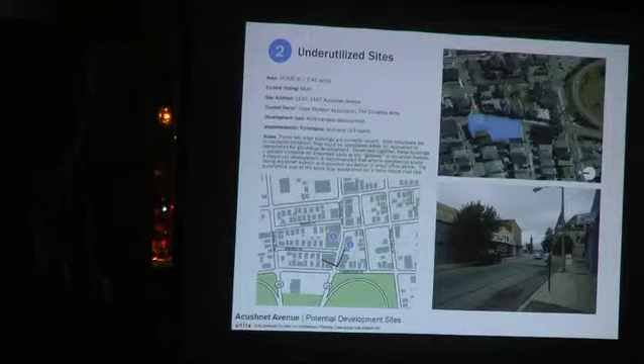The other thing that we think is critical as another first step, besides development on city-owned or private parcels, is to begin seeking grants for streetscape improvements. These are meant to enhance the pedestrian experience along Acushnet Avenue, and they're also meant to deal with things like traffic calming and improvement of traffic behavior along the corridor.

This is really a placemaking project, as much as it is a transportation project. So our streetscape recommendations try to balance transportation questions, truck turning radii, traffic speeds, where the bus stops are, with an ability to capture back more sidewalk space or outdoor cafes, or to enhance the kind of festivals that happen.

So we did some extensive field trips here during the hottest months of the year, I'm remembering now. And we looked at both the pros and cons of the existing conditions.

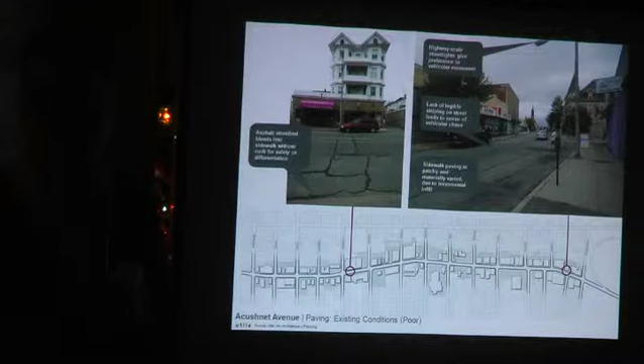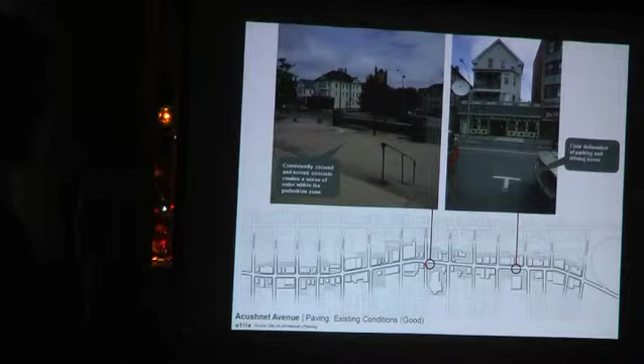It's good, for example, to mark where cars park so they don't take two spaces—better parking management along the valuable parallel parking spaces, which are key for a quick in and out for shopping. There's also, in front of the church, better examples of landscaping that enhance the experience.

And we identified a kit of parts and strategies that might together make up a better public realm along Acushnet Avenue. That includes things like recapturing sidewalk real estate by selectively removing parallel parking spaces to get wider sidewalks, where it might make sense for an outdoor cafe or a bus stop.

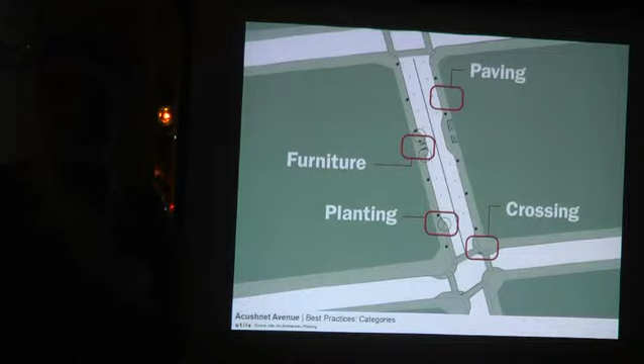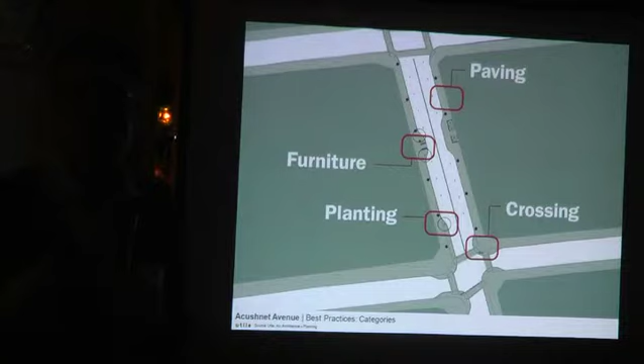Dealing with neck downs at the pedestrian crossings at intersections to create a perception that the street is narrower there for pedestrians to cross back and forth, to not prioritize cars over people. And dealing with selective street plantings and street furniture to make it a more user-friendly landscape. As part of our study, we collected best practices for paving materials, streetscape approaches, and bicycle racks.

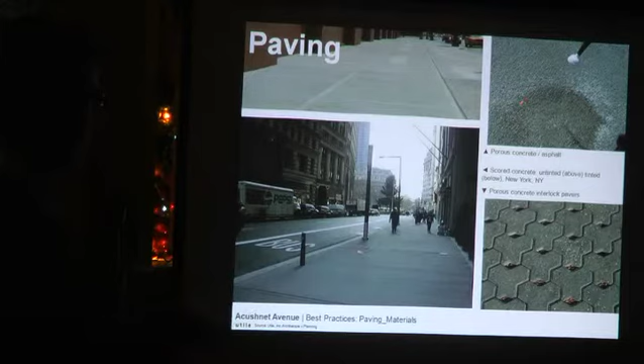I'm not going to go through this in detail now, but I'm going to show you a couple of slides with examples of paving—in some cases pervious paving, which means we can send less stormwater into the storm drains to deal with stormwater flows—or more attractive paving patterns as they might happen along the avenue.

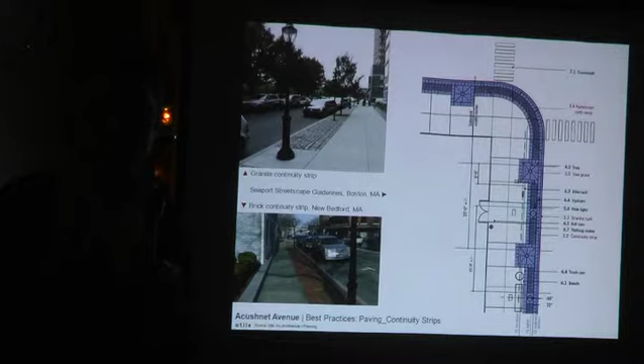One of the things we're recommending is to create what's called a continuity strip, a different paving detail right next to the curb that collects the street tree grates, the bike racks, the mailboxes, and the bus stops, to begin to organize some of the street furniture along Acushnet Avenue.

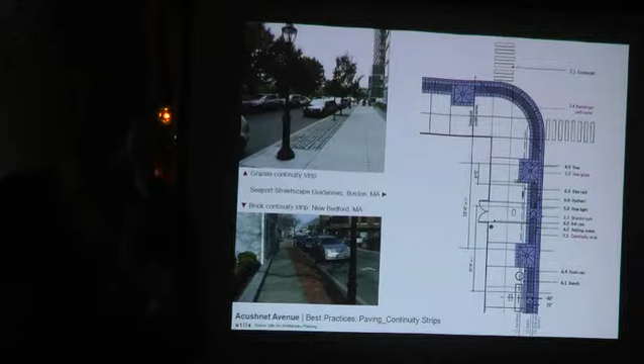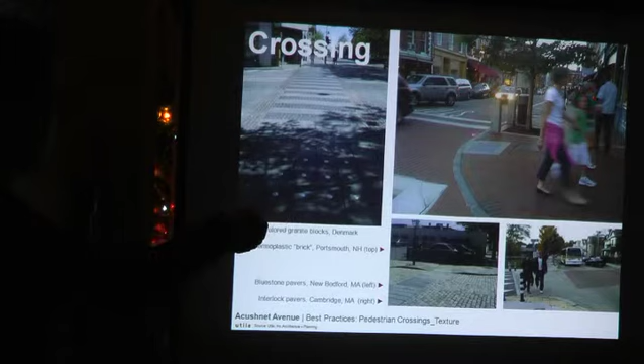And to really enhance those points at the intersections where crosswalks happen, where you can do curb extensions into the zone where the parallel parking happens to get what's called neck downs between the two sides of the street, and even look for ways that we can unify with paving the pedestrian experience across both sides of the street.

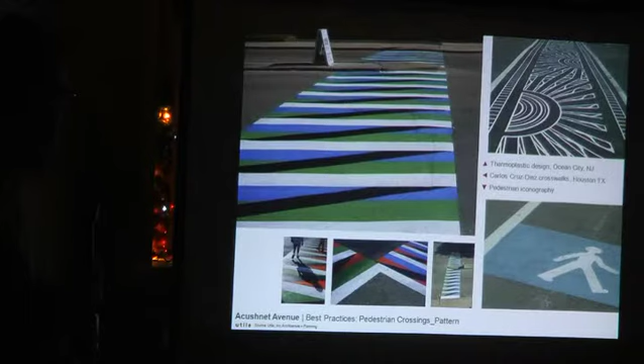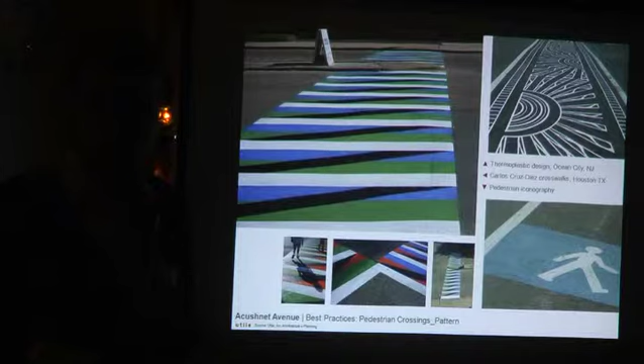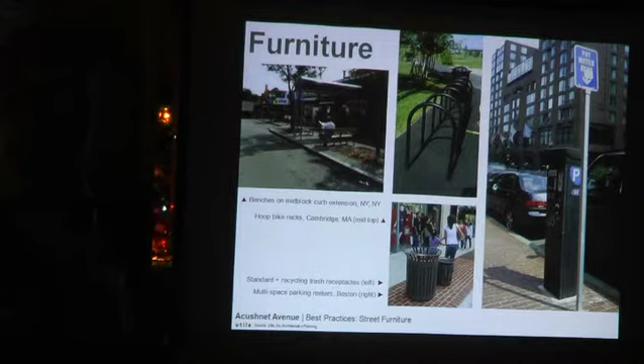And then getting a standard for the street furniture, so that the garbage cans, the bicycle racks, and maybe even a different way to deal with metering, if we can find the right grant monies for this, might make it a more attractive destination for pedestrians to come.

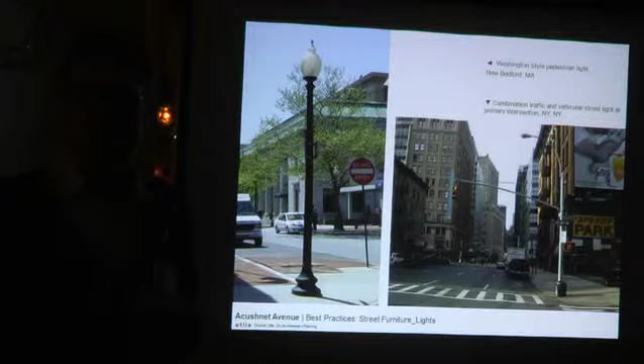And also streetlights too. So that gives you an idea about what our palette might be for thinking about the study area as a single placemaking exercise, and planting as well.

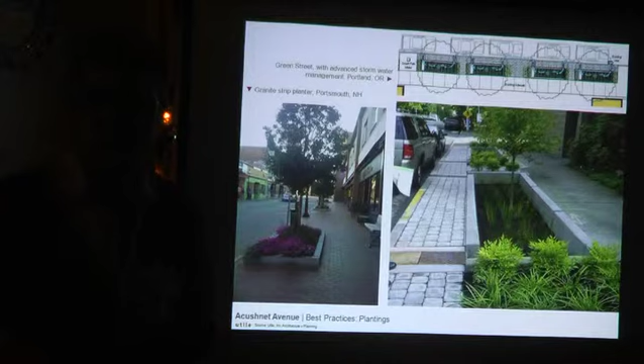These are fancy stormwater solutions in Portland, Oregon, where they don't have snow plowing and salt and sand, so it's a little easier to do it there. You guys will find solutions for our climate as well.

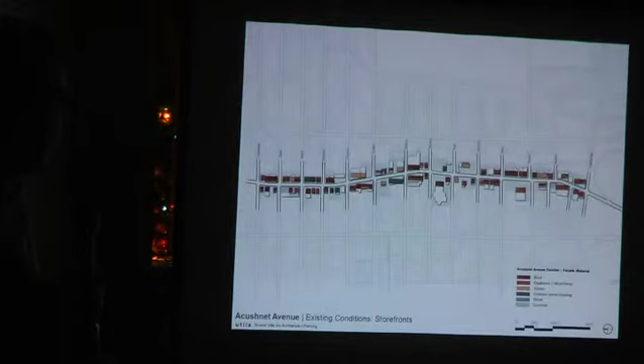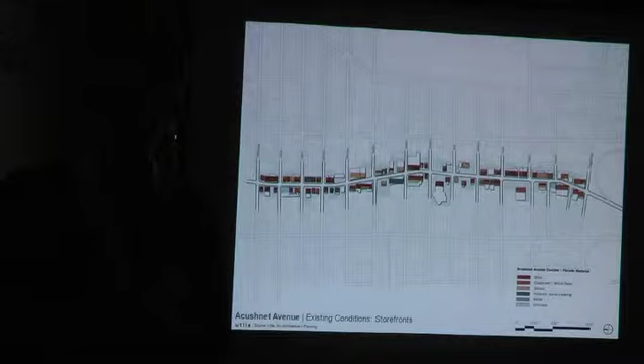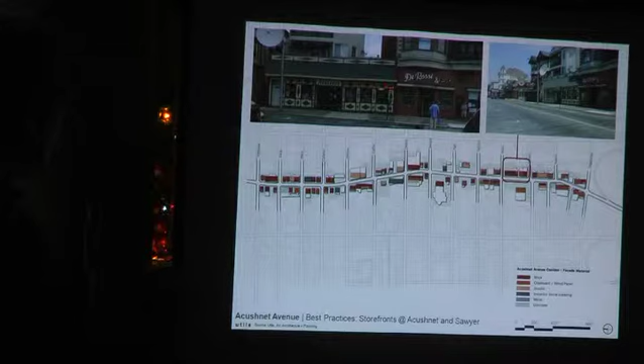This is a map of the variety of materials that make up the shop fronts. We would rather leverage the variety of signs, graphics, and materials and enhance that as much as possible, not turn it into a perfect thing that Acushnet Avenue isn't. We actually like and celebrate this kind of variety, and even drew it ourselves as part of our plan. So I don't know how you enhance what already happens naturally, but it would be nice if strong graphic ideas for signs, for the difference along the street, were part of the logic of the future of the storefronts, if that makes sense.

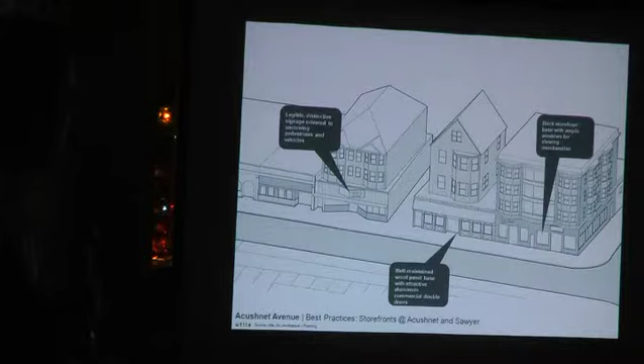Then streetscape case studies. What we ended up doing was dissecting Acushnet Avenue based on the kinds of intersections that are there. What's amazing about that stretch is the blocks are very small, and there are a million intersections. In a way, that adds to the vitality of the street, because there are lots of cross streets coming in. The grain of the residential community plugging into the street happens quite often, and that's I think why historically the street's always been so successful.

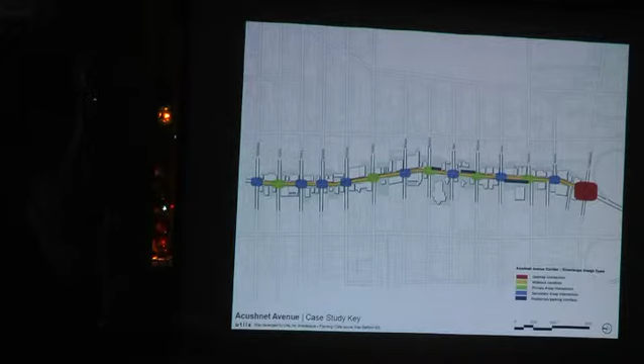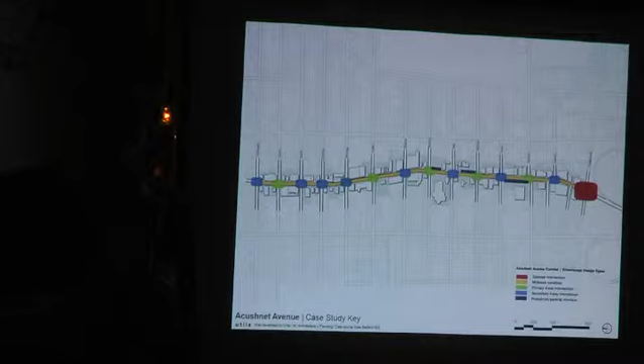It's got a very strong tie back to the neighborhood physically. We ended up identifying two kinds of intersections: primary intersections, which have to do with more important cross streets that run all the way back to the park to the east or to the west, and secondary intersections. The blue ones are secondary, the green ones are primary. We also focused on how important that threshold was into the neighborhood itself, coming off 195, coming from the downtown area and coming in.

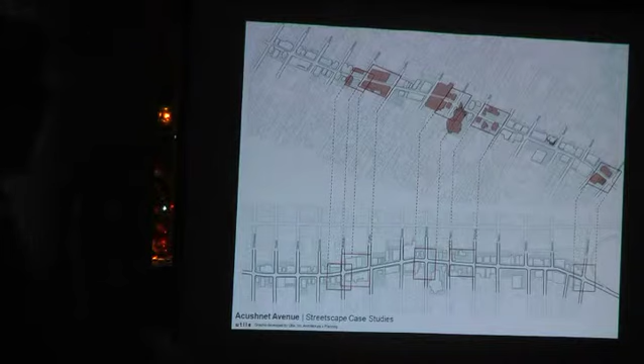So we ended up taking one of each of those conditions, and we literally took them out for a full design test drive just to see what the opportunities were. We've moved from a planning logic to a design logic. For example, we looked at this secondary intersection, this mid-block condition, this primary intersection where parking lots actually meet the sidewalk, which we thought required some attention, and then what the gateway might be as an experience coming into the neighborhood.

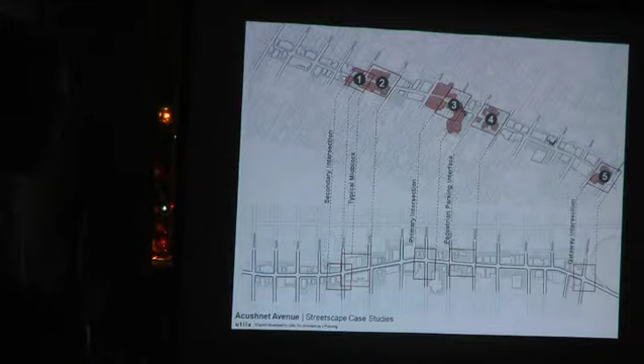I told you this was long, and I apologize. No, it's great. Is it okay? Yeah, it's great. Keep going? Yeah, I can stop at any time.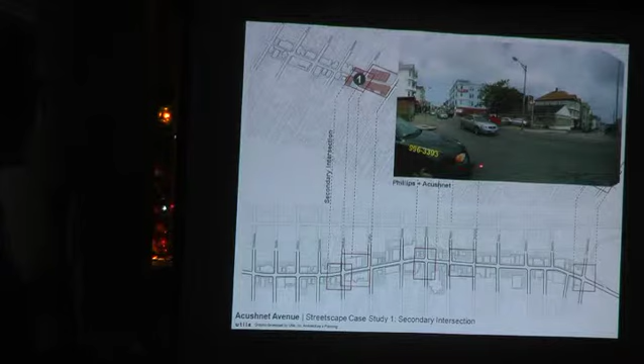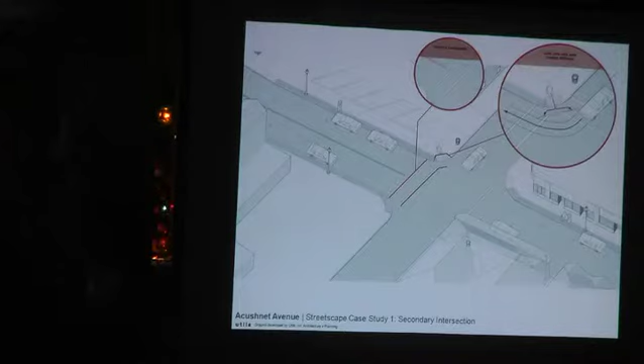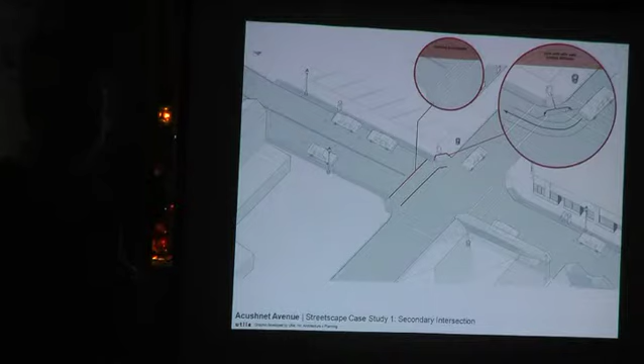In case of the secondary intersection, we looked at Phillips and Acushnet here. We ended up redrawing the intersection as a line drawing so we could diagram what the opportunities were. The first was to rethink the crosswalk, its relationship to the handicap access apron, to make that a better experience. It all comes down to, in terms of logics, the curb extension, which is to take this real estate back, the parallel parking zone, and bring the sidewalk out into it on roughly a 45-degree angle, if that makes sense.

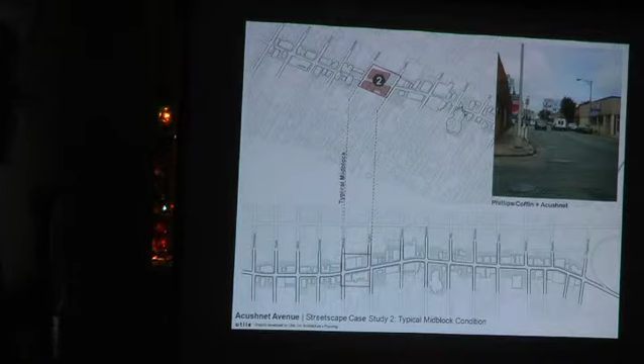What that means is you get two different crosswalks leaving from that same area instead of one awkward 45-degree angle that comes down but then has to go in both directions. So this piece of real estate has come back out into the street to make that a much more pedestrian-focused intersection.

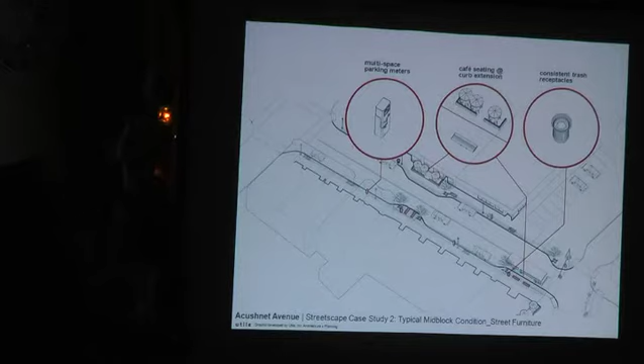And then you can do that where opportunity might suggest, because there's a logical candidate for an outdoor cafe. It then allows for an outdoor cafe to happen and people to walk by. It might also be a place for a bus stop or just benches. I think when this is rolled out as an actual project it would be done quite opportunistically, and where those happen against the balance of parking left would be negotiated block by block, which is another project for all of you, I would assume.

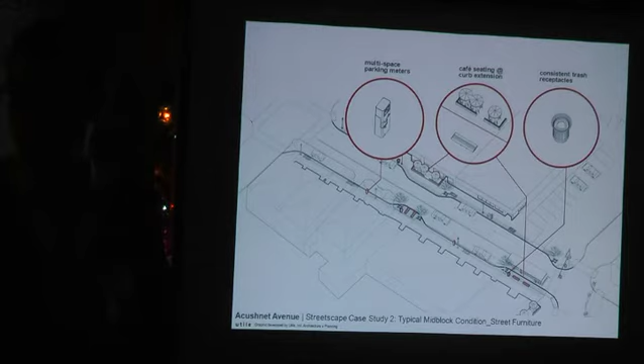But I wanted to show that this is about how you negotiate the real estate of the public realm. How much do you give to cars—and by cars I mean both travel lanes and parallel parking spaces—and how much you give back to people. This is, in a way, the primary strategy that we're talking about.